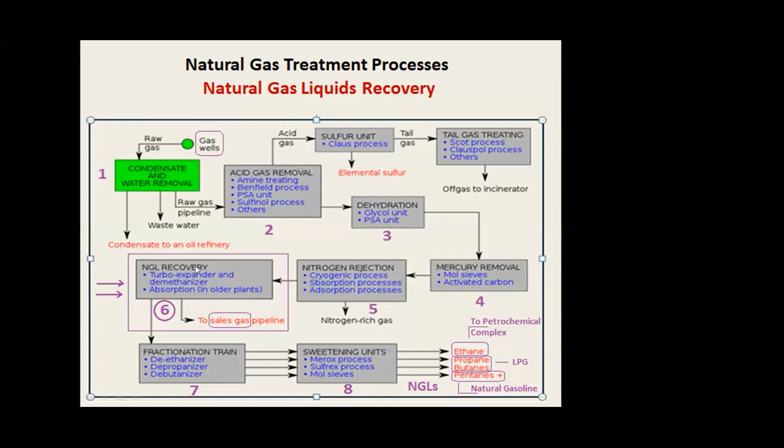We will cover in today's session the beginning of the natural gas liquid recovery process, one by one. Okay, let's go to the next slide.

This slide has the sales gas or pipeline gas specifications. I highlighted the methane concentration and the ethane concentration. Since we are now dealing with step 6, natural gas liquids recovery, we are concerned with the ethane concentration. As you see, the ethane concentration should be in this range.

4.6% ethane as maximum, right? The lower limit is not that important, but the upper limit is the important one, not to exceed 4.6% ethane. As long as you adjust this percentage of ethane by processing, you can have the rest of the hydrocarbons under control with lower concentrations than this range. You will see this in the next slide.

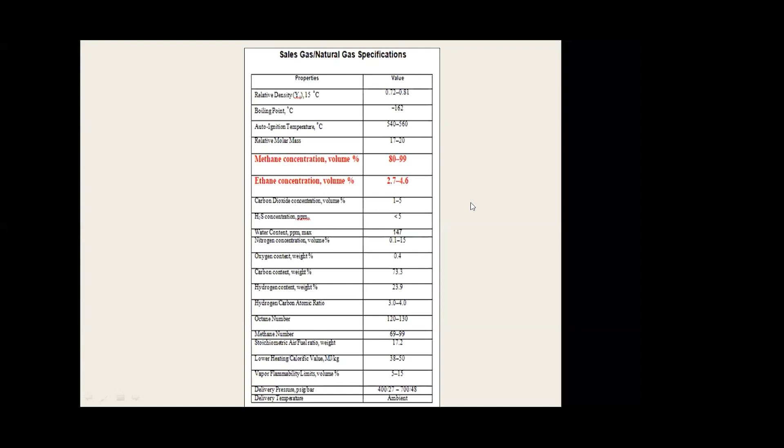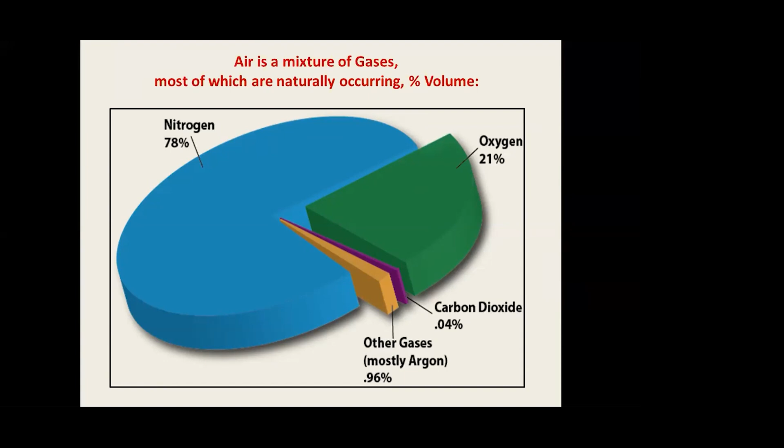Before we go further, I would like to give a hint about the liquefaction of gases, starting with the liquefaction of the gases in air. The air composition, as you see, nitrogen, oxygen, carbon dioxide, other gases in very small percentage, approximately 1%. We will see this as technical data, very important before you enter the topic of natural gas liquids or liquefaction.

You see this, the oxygen. We were only able to liquefy oxygen in 1883, in the 19th century. By the end of the 19th century, oxygen was liquefied, turned from gas to liquid, and its boiling point is minus 183.

Same year, in April, we were able to liquefy argon at boiling point minus 186. And as you see, nitrogen came after argon, and its liquid boiling point is minus 196.

In the beginning of the 20th century, in 1908, we were able to liquefy helium at minus 269 degrees Celsius. As you see, the harder the liquefaction process, the longer it took to liquefy.

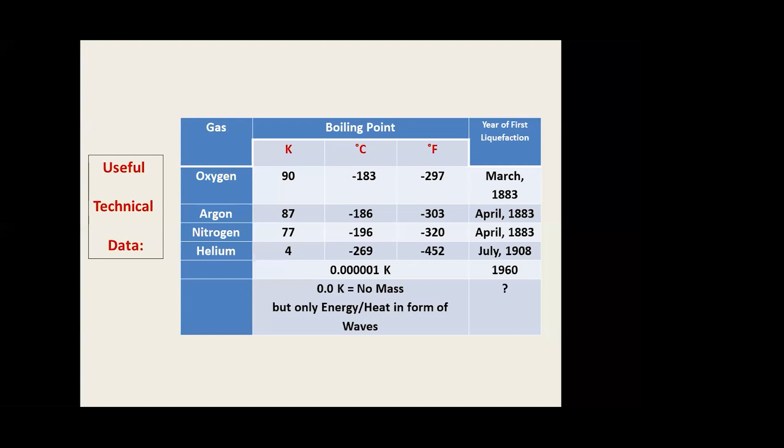This data is important before you go ahead and study the liquefaction of natural gas or natural gas components. Here we have one more important technical data.

These are the hydrocarbons, starting with methane, ethane, propane, butane, and then the red line means these are gases or vapors at room temperature. As you see, they all have negative boiling points.

The liquid form of these gases boils at minus 161 for methane, minus 89 for ethane, minus 44 for propane, minus 0.5 for butane. These figures are important in our lecture.

Starting from pentane, we have liquid hydrocarbons boiling at 36 degrees, so it is a liquid at room temperature. Hexane, heptane, octane, nonane form the gasoline range that we use in our cars. After we cross C9, we have kerosene.

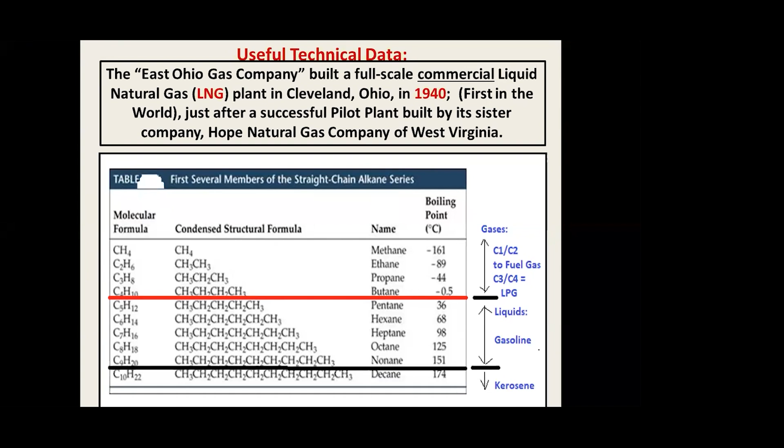Then we come to the first slide in our topic, the definition of dry gas and wet gas. I would prefer lean gas and rich gas. We are talking about hydrocarbons, not moisture. With moisture, you can say dry and wet.

Dry means no moisture, wet means there is moisture. With hydrocarbons, it's better to say lean gas and rich gas. Lean gas means very low concentration of hydrocarbons that can be liquid at room temperature. This is the simplest definition of lean gas. What about rich gas? You can say it has considerable concentration of hydrocarbons that can be liquids at room temperature.

But let us see the definitions in the books. It says lean gas is natural gas that occurs in the absence of condensate or liquid hydrocarbons—natural gas without liquid hydrocarbons. This is the easiest way to describe lean gas: no liquids can be obtained from this gas.

It is the gas that has had condensable hydrocarbons removed. As you see, most natural gases can have condensable hydrocarbons. So when there is industrial processing, these condensable hydrocarbons are removed and turn the gas from rich to lean.

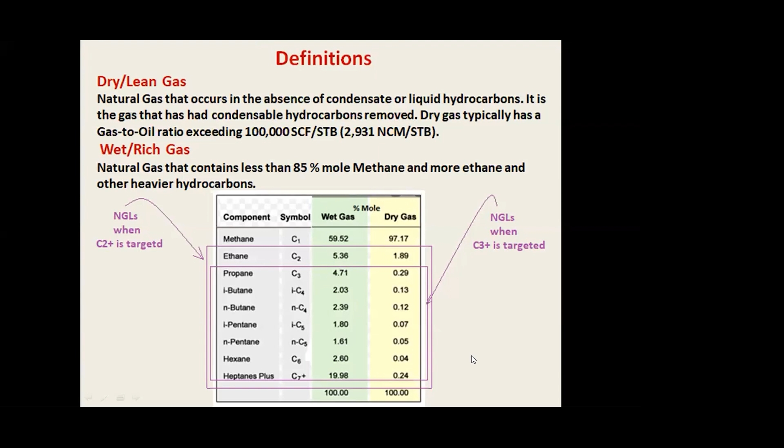Okay, this is an important slide showing what we are going to discuss in the next 3 slides. This is the known phase diagram for natural gas. A typical natural gas, as you see, has pressure plotted against temperature. And we have this envelope of 2 curves: on the right, the dew point curve, and on the left, the bubble point curve. They are supposed to meet at the critical point.

On the right of the dew point curve, we have one phase, which is vapor, and also we have one phase on the left of the bubble point curve. Upward from the critical point, we have the supercritical fluid region.

Very important in the topic of natural gas liquids recovery is the cricondentherm. This vertical line passes through the highest temperature the natural gas envelope can reach. This line, which passes through this point, is called the cricondentherm. It will define what kind of gas reservoir we have, in the next 3 slides.

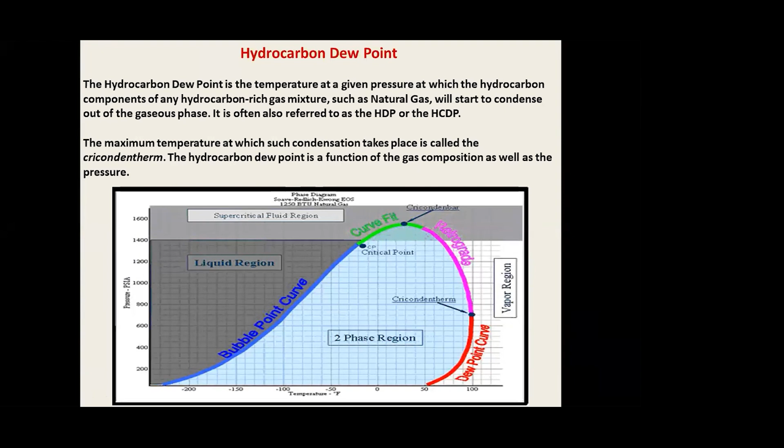Inside the envelope, we have liquid and vapor, two phases. Okay, this is very important for the coming slides.

One more definition. What is the dew point? You can say that the natural gas liquid recovery processes are made to adjust the dew point of the hydrocarbons in the natural gas. What is this dew point?

Hydrocarbon dew point is universally used in the natural gas industry as an important quality parameter. It is stipulated that it should be written and agreed upon in contractual specifications and enforced throughout the natural gas supply chain. It is compulsory from producers through processing, transmission, and distribution companies to the final end users.

Not yet the definition, here is the definition. The hydrocarbon dew point of a gas is... So it is, I would say from my experience, and I carried out this test in Oman while at Occidental, the dew point is the first drop you observe when you cool a gas on a cold surface. Watch for the first condensate drop and record the temperature at which this first drop of liquid shows up.

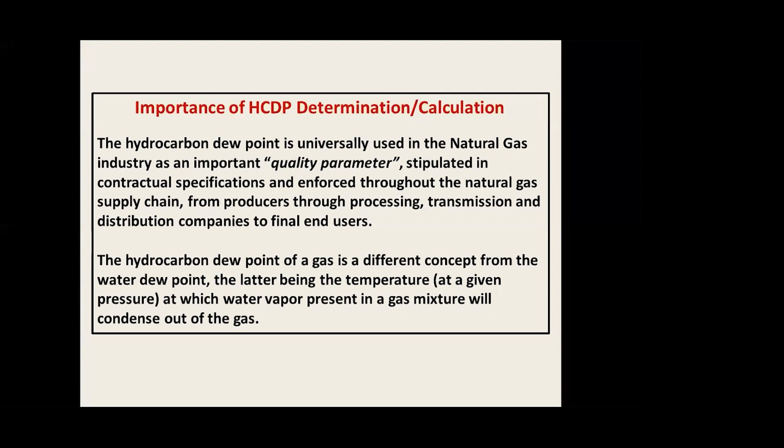The hydrocarbon dew point of a gas is different from the water dew point, the latter being the temperature at a given pressure at which water vapor present in a gas mixture will condense out of the gas. So the dew point of a hydrocarbon mixture is the temperature at a given pressure at which liquid hydrocarbon present in the gas will condense out and show up as a liquid. Okay, we are done with this.

Natural gas liquids recovery: most natural gas is processed to remove the heavier than methane hydrocarbons, starting from ethane, which is C2. It is expressed as ethane and heavier, C2 plus, which are named natural gas liquids. So natural gas liquids in general term means ethane and heavier hydrocarbons.

Natural gas liquids in more detail: they include C2 ethane, C3 propane, C4 butane, natural gasoline C5 plus, and if you start with C6, it is called natural gas condensate, C6 plus. So natural gasoline is expected to start from C5 and end at C10. Natural gas condensate starts from C6 and doesn't stop at C9 or C10 - it can go to C15 and C16.

Purpose of natural gas liquids recovery: control of the dew point of the hydrocarbon components of natural gas to avoid unsafe formation of liquid phase during transportation or in pipelines. When natural gas liquids condense during transportation, they make problems. Natural gas liquids must be removed for natural gas to meet sales gas specifications - as I said, this shows up as C2, the ethane percent mole, at 4.6 max.

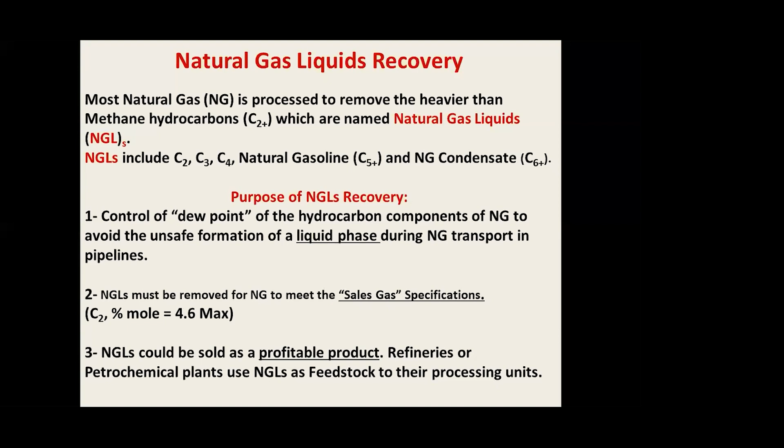Natural gas liquids could be sold as a profitable product. Refiners or petrochemical plants use natural gas liquids as feedstock for their plants. If you extract them from the natural gas, you can sell them to nearby refiners or petrochemical complexes.

Now we will see three different reservoirs according to their natural gas envelope. The first reservoir is dry gas. We are at point one, the reservoir pressure and temperature. Here is the cricondentherm, the maximum temperature that passes through the envelope. The reservoir is outside, at a higher temperature than the cricondentherm, and the separator is also outside the two-phase region, outside the envelope.

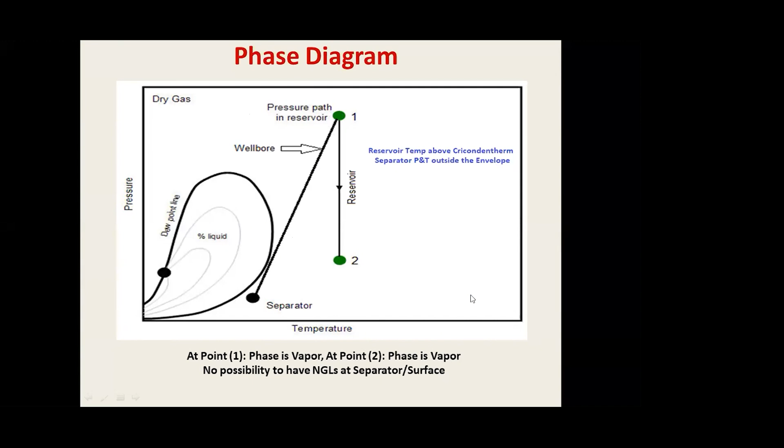So when the gas leaves the reservoir through the well bore and goes up to the surface, to the separator, there is no phase change. It was a vapor here and ends up as a vapor in the separator. No liquids from this reservoir - it is called dry gas or lean gas. Okay, let's see the second one - this is the condensate retrograde reservoir.

But I think we skipped this one - the retrograde case, number one point one. The reservoir is between the critical point and the cricondentherm. Here, from point 1 to point 2, it starts to liquefy at point 2, meaning inside the reservoir. We don't need condensates inside the reservoir, because it will stop the flow of the gas. So from point 1 to the surface, we will have interrupted gas flow. At times, we will have no gas flow because of the formation of condensate inside the reservoir.

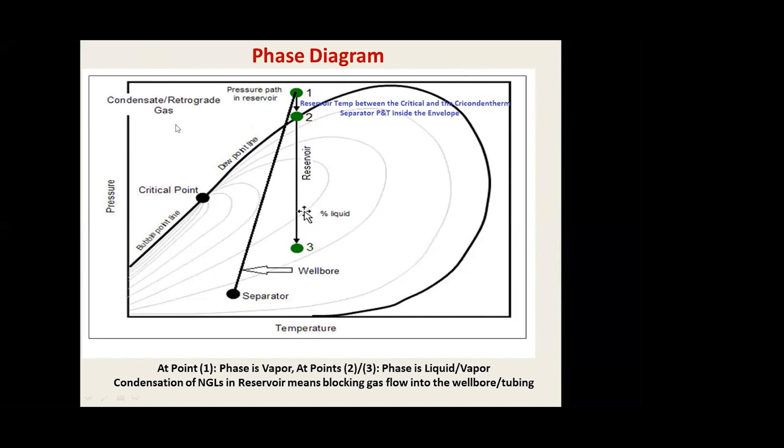This is not desired for targeting natural gas liquids recovery. But this one, we can have, because there is no condensation inside the reservoir as the hydrocarbons leave the reservoir and go to the surface. It will only drop here in the separator as natural gas liquids. But inside the reservoir, there is only one phase. So this wet gas is the proposed type of reservoir to produce natural gas liquids.

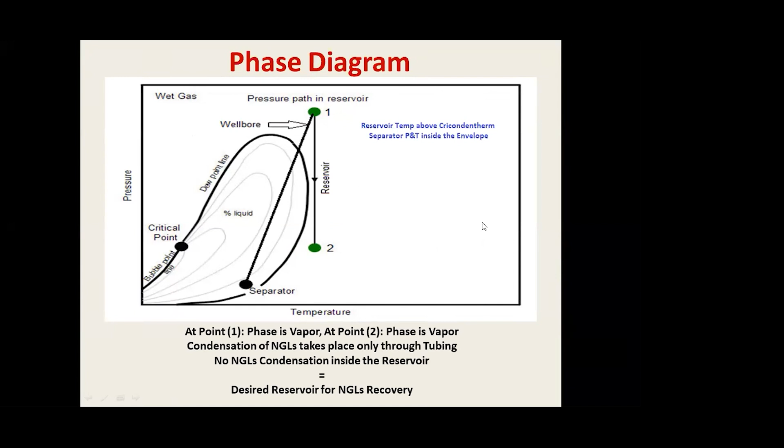Natural gas liquid recovery process.

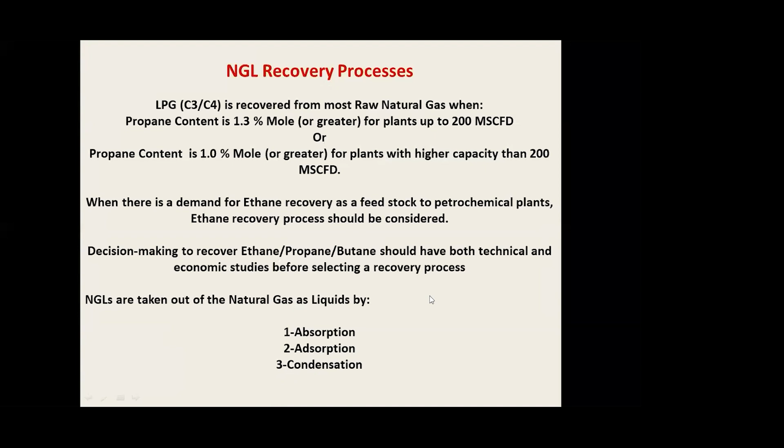Now the process. As you see, we have absorption. We can get the natural gas hydrocarbons that can be liquids by absorption, by adsorption, by condensation. This is number one, the lean oil absorption process.

Very simplified flow diagram. This is the feed gas, natural gas, coming in through the absorber. This absorber receives lean oil, which can be in the kerosene range to solar gas oil - it could be either kerosene or gas oil. We call it lean oil. This lean oil drops inside this column, the absorber column.

This is a column, and it has trays or packing. The natural gas going up because it is light, and the lean oil going down as it is heavier. Counter current, there is contact between the two phases. The heavier hydrocarbons are preferentially absorbed into the oil. This oil comes out from the absorber with the heavier hydrocarbons dissolved in it.

We want now to get rid of these dissolved or absorbed hydrocarbons, because they will be a product for us. So the rich oil, rich in hydrocarbons, will enter a fractionating column that boils off these hydrocarbons, and we will get them and condense them later as natural gas liquids. What about the natural gas itself after removal of the heavier hydrocarbons with the oil? It comes out from the absorber as dry natural gas.

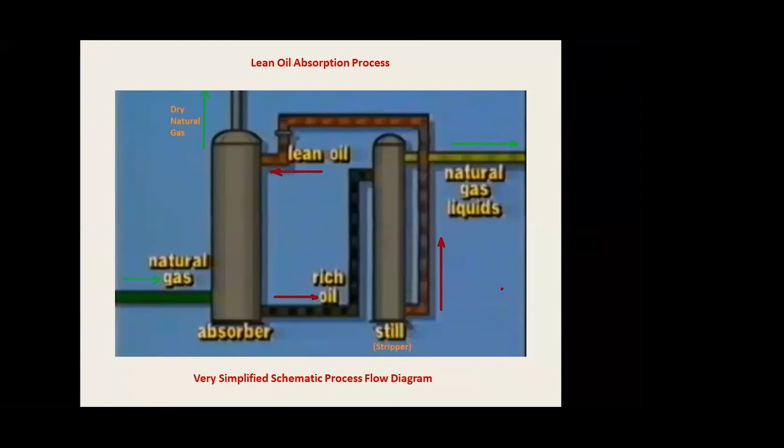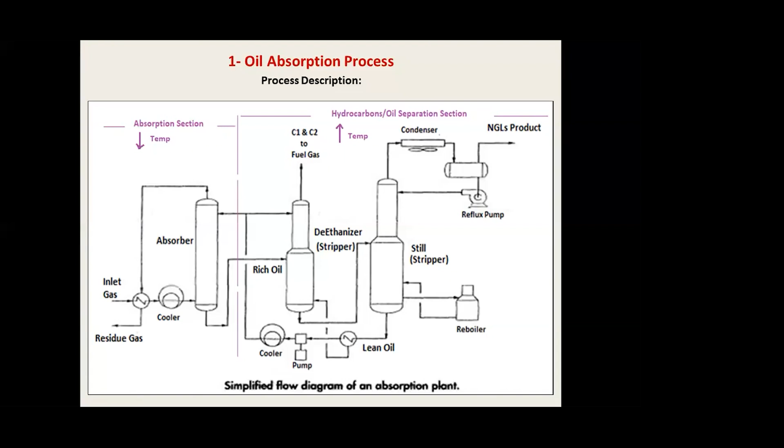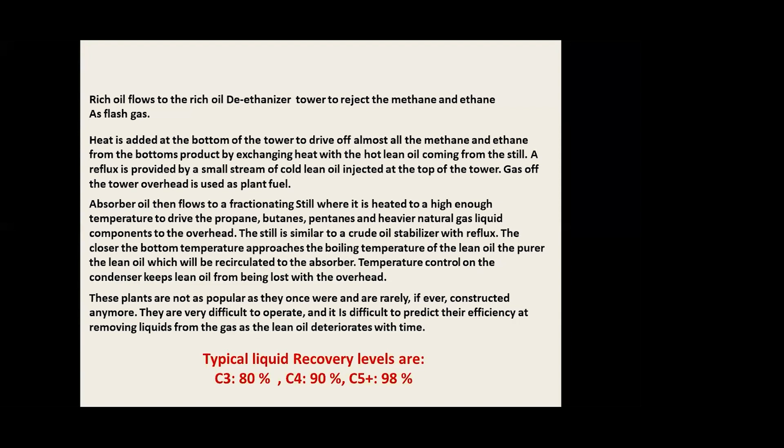The absorption method again, it's this process description that I just told you about, nothing new, because we are running out of time. This is the typical liquid recovery levels: C3, as you see, there is no recovery piece for C2 in this process. C3, 80%, C4, 90%, C5 plus, 98%. The other methods that we will study later have higher recoveries than this one. This is the design criteria, no time to discuss it.

Solid adsorption in natural gas liquid recovery. Instead of the oil, we can use a solid adsorbent that can preferentially adsorb the heavier hydrocarbons and leave C1 and C2 as gas. So this is just a vessel, and it is packed with a bed, an absorbent bed.

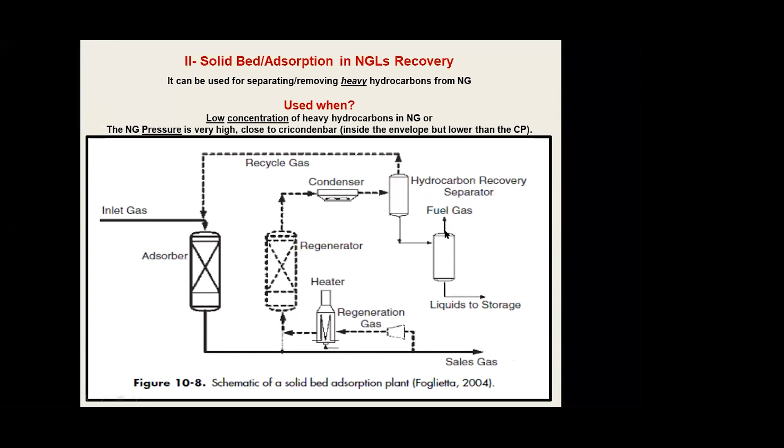But here we have the inlet gas and sales gas as a product, and here we have natural gas liquids also as a product. Some of the gases are flashed here and will be used as fuel gas.

Which solid bed can we use? You can have silica gel, activated charcoal, molecular sieves. Each plant has its own selection, its own choice, which one can be used.

When to regenerate? When the bed becomes saturated with condensates, when the adsorbed material breakthrough is detected in the outlet. When you reach this saturation with condensates on the adsorbent, you will start to see heavy hydrocarbons going out with the outlet gas. You will see rich gas again, not dry gas, not lean gas. This could be easily detected by the gas chromatograph.

Operational cycle time, what's the time for each cycle? From 20 minutes to 2 hours, depending on how much condensate is present with the natural gas. The preferable recommended cycle is 1 hour, but I have here a case study from Rosetta gas plant in Egypt at the Mediterranean coast, and it has a process cycle of 3 hours. The vessel is big, with large dimensions, and as you see here in details, we have the silica gel they use commercially called Sorbead H material.

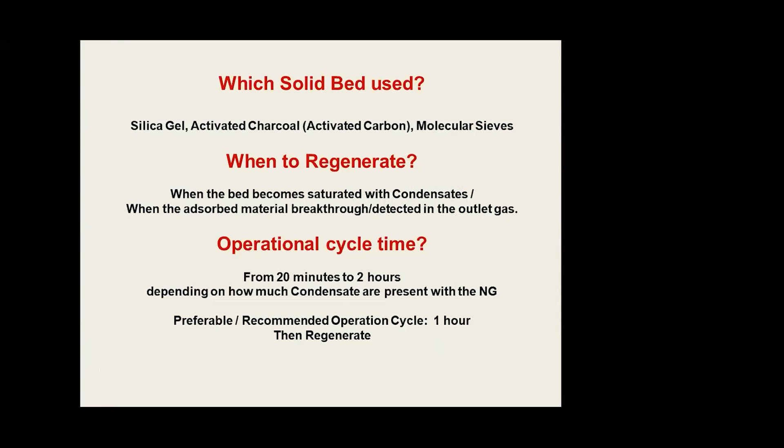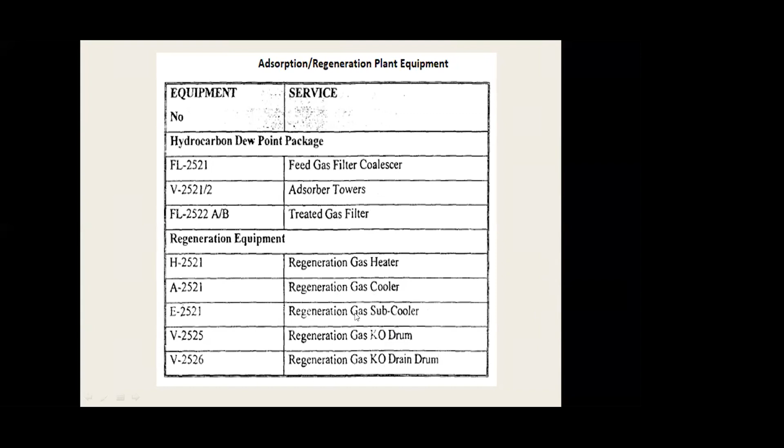This is the detail. You see here the difference between a very simplified flow diagram, and here we have a detailed process flow diagram, which is easier to interpret by this abbreviated form of the main equipment used in the Rosetta plant: the gas filter, adsorption tower or adsorption vessels, filters again, heater, cooler, subcooler, knockout drum. If you see these equipment, you can easily read this process flow diagram.

There is regeneration, as I said, the process and regeneration, they are both 3 hours each.

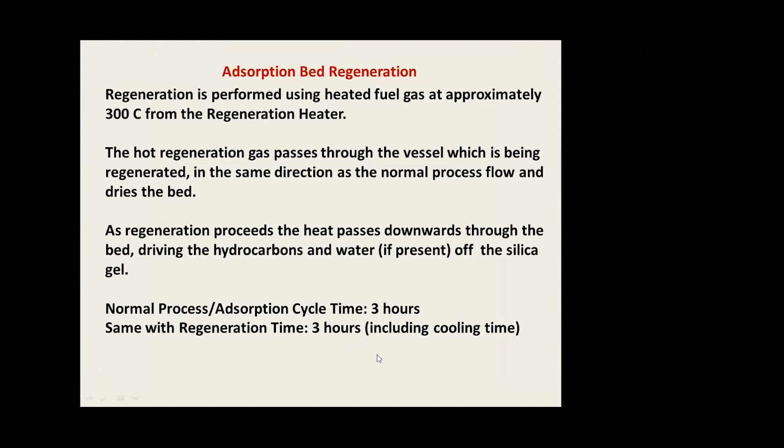Now we have the production path. We can have a reservoir here, and this is the gas envelope. This is just an introduction to tomorrow's lecture. This here is the reservoir, and this is the tubing, and here is the entrance into the surface equipment. This is the gas exchanger, and here we have the chiller to condense the heavier hydrocarbons.

This is the first one, mechanical refrigeration, represented by ABC. I'm saying this is just introduction to tomorrow's lecture. We have here the reservoir conditions of the wet gas reservoir, and this is the production path from R to A. From A to B is a gas heat exchanger, present in all of the coming processes. From B to C represents the propane chiller. From B to C dash represents the self or JT, Joule Thomson refrigeration, ABC dash. From B to C double dash, the cryogenic refrigeration.

So after we are finished with the oil absorption method, then the solid adsorption method, we come to the condensation method, from absorption to adsorption to condensation. The condensation can be done by these three: mechanical refrigeration, self or JT refrigeration, cryogenic refrigeration. How they are present in the pressure-temperature plot diagram.

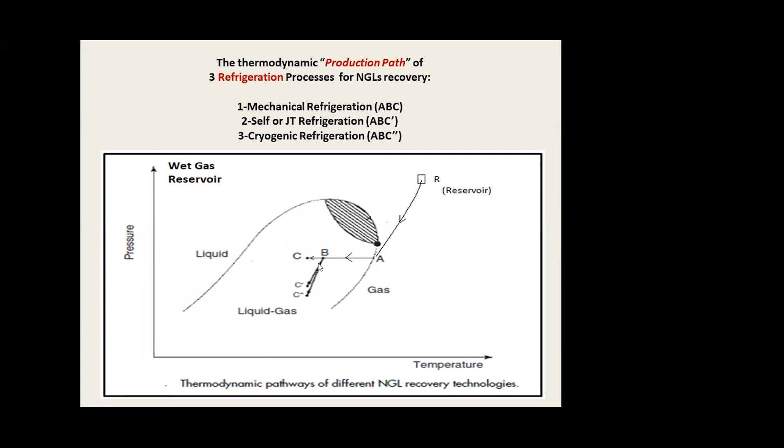From B to C dash, when the gas goes through the JT valve. And from B to C double dash, when the gas goes through the turbo expander. These three methods will be discussed in tomorrow's session in detail.

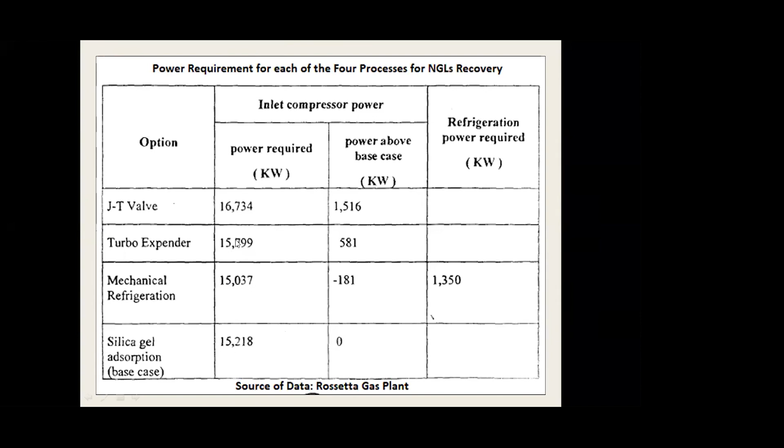Here is the power consumption: in JT valve, 16,000. Turbo expander, 15,799. Mechanical refrigeration, 15,037. Silica gel, 15,218 kilowatts. As you see, this is from Rossetta Gas Company, Rossetta Gas Plant. They show that the silica gel adsorption is comparable in power consumption with the three condensation processes, not far from these figures.

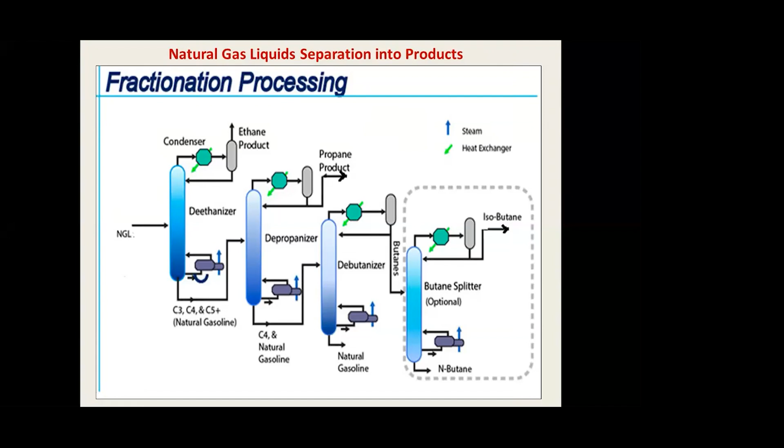This was the last slide in my presentation, Dr. Rahima. Dr. Rahima, are you here? Yes, yes, I am here. Okay, this was the last slide in my presentation.